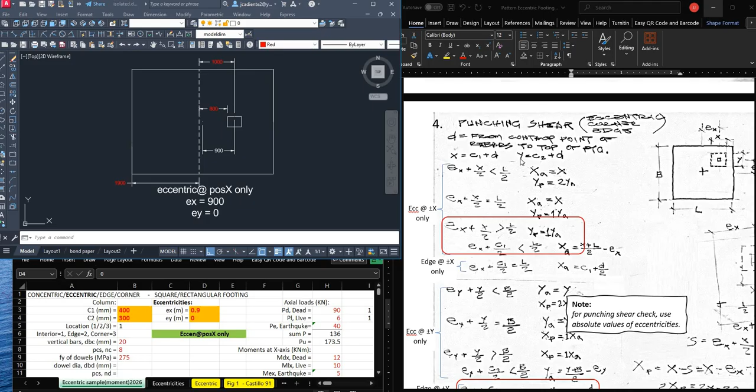Punching shear is also known as two-way shear, meaning shearing happens in both X and Y directions. Meanwhile, check number 5 is beam shear, which is shear happening in one direction only at a given time.

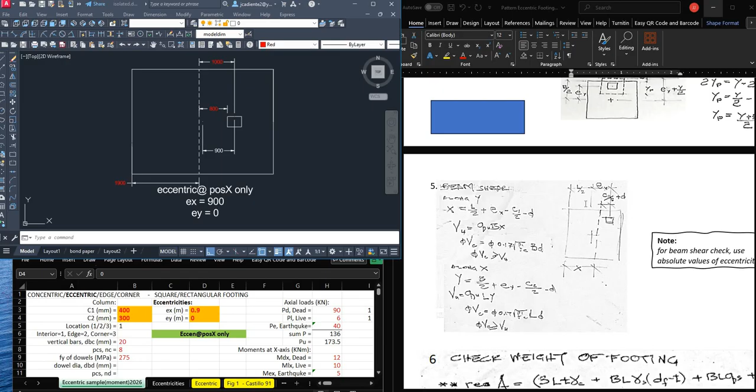So we are along the Y direction first. Here is our column. The force pushed by soil pressure Qu would come from this area. This broken line is the shearing plane, or the shear perimeter.

This shear plane is defined by the distance C1 over 2 plus D. C1 over 2 is half the column width, and D is defined by 800 mm, the distance from the contact point of rebars to the top of footing. In our sample, the D for punching shear is the same D here in one-way shear. So D from the face of column to the shear plane is D.

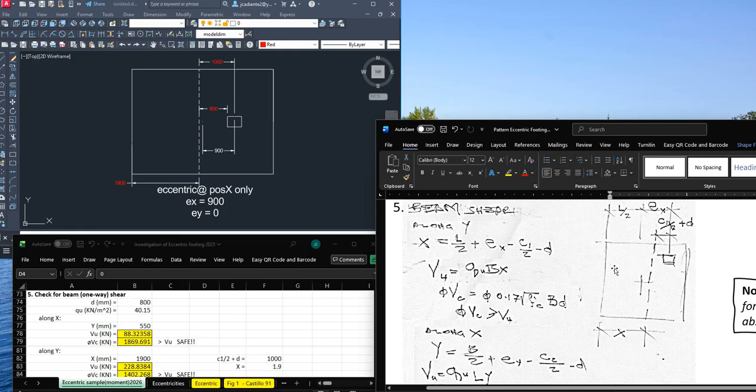By geometry, we get distance X, because X multiplied by height B gives you the area that contributes to the shearing force. So let's get X, which equals L over 2 plus eccentricity Ex, minus the distance C1 over 2 plus D.

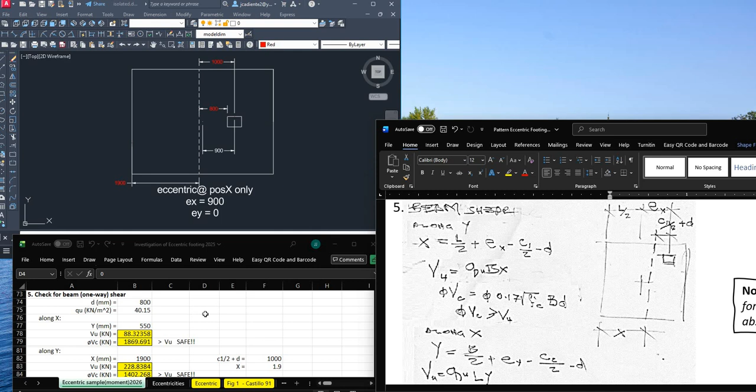Now here is our sample. Let's say we have an eccentricity of 0.9 meters. This is the center. So eccentricity is 0.9.

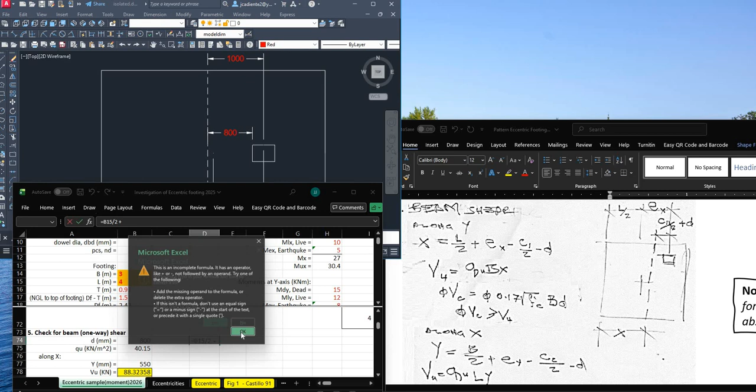Let's compute distance X. That equals L, which is 4 meters, divided by 2, plus eccentricity of 0.9. Take note that you take the absolute value here, because even if it's negative 0.9, it becomes positive. This equation is applicable to eccentricities in either positive X or negative X.

Then minus C1 over 2. C1 divided by 2000, since it's in millimeters, minus D, also divide by 1000 since it's in millimeters. You get X equal to 1.9.

So this is along Y. This computed X from before is the shearing along the Y direction, so your X now becomes 1.9. If you're not sure, plot it in AutoCAD. This shearing plane happens at a distance D from the face of column, so measure that - it's 1.9 meters or 1900 mm.

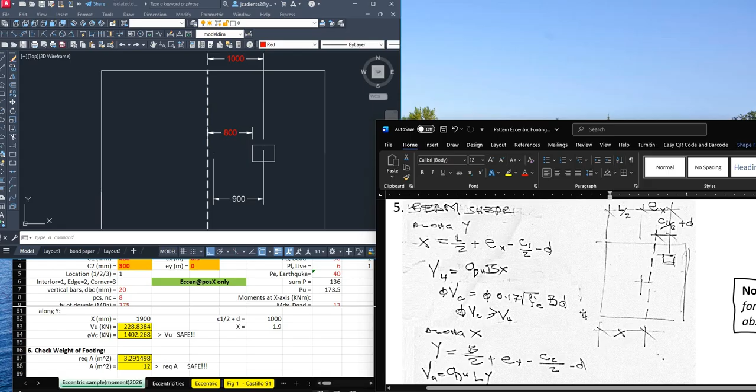Now what is this 1000? It's simply the distance C1 over 2 plus D. Now let's get the shear force contributed by the area, so B times X. Our B happens to be 3 meters, so that equals 3 times 1.9.

That's in square meters. Then we directly multiply by Qu. Where is Qu? Let's get it from check number 3: 40.15. Then the allowable shear force is phi Vc, 0.17 square root of f prime c times capacity reduction phi times BD.

The shear area is this distance B, the length of the shear plane, multiplied by the shearing thickness D. Let's compute that: phi of 0.75 times 0.17 times square root of f prime c, times B of 3 meters, times D.

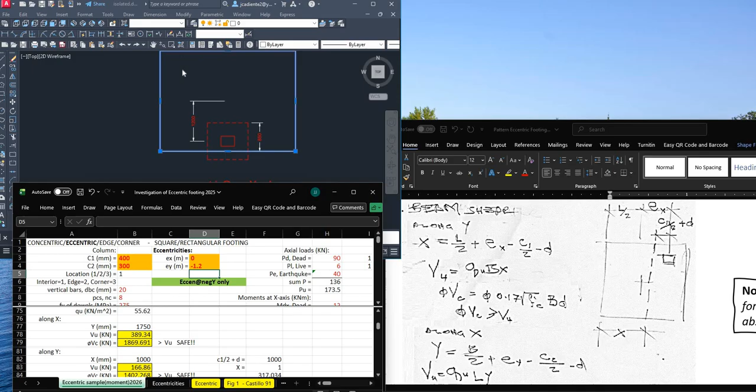The same principle applies to shearing along X. Let me take a sample. This time our eccentricity is negative 1.2 meters. So 0 and then negative 1.2. The shear - let me delete this - happens at distance D from the face of column.

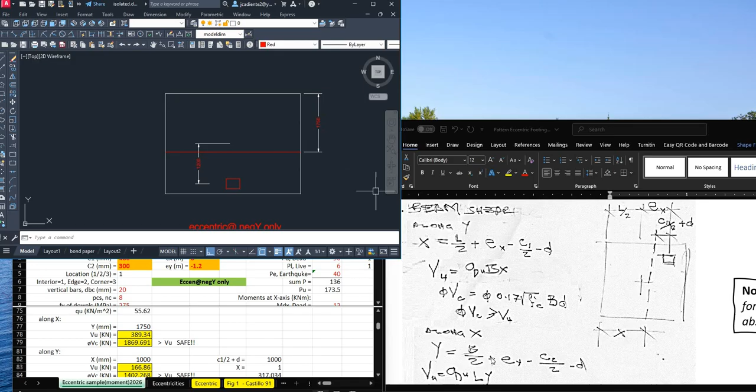So we measure here: 800. Let's say this is the broken line - that's the shear plane. Let's get this measurement. This is now your distance Y, 1750. Now let's compute that using this equation.

That equals B over 2. Where is B? It's 3. So B over 2 plus eccentricity Y - take note, we take the absolute value. Our eccentricity Y is negative 1.2, minus C2 over 2. This is 300 divided by 2000, minus D of 800.

Okay, let me just edit this. So this is B over 2, B over 2 plus absolute value, minus C2 over 2000, that's C2 minus D, and that equals 1.75 meters.

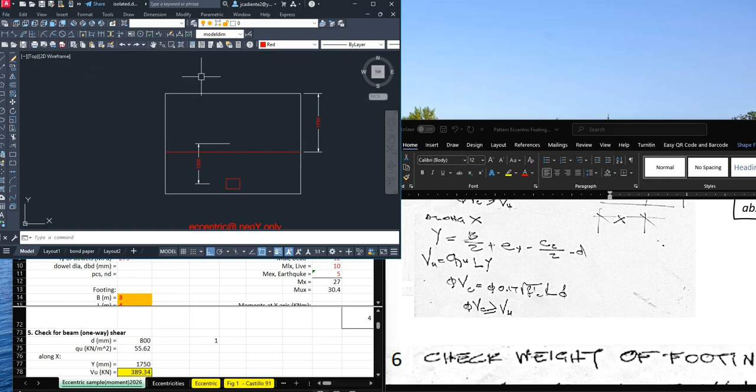Now that is the distance Y, which is this 1750. That's how I got 1750. Multiply this by 1000 to get millimeters, then multiply it with your length L. Our L is 4 meters.

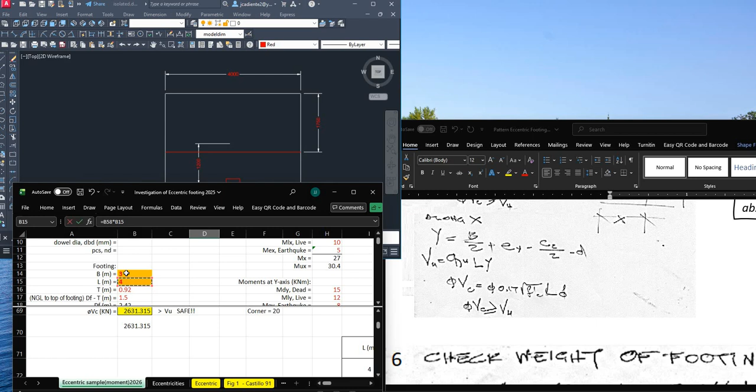Let's solve your VU now. Our VU equals our Qu, 55.62, multiplied by L, multiplied by our distance Y, divided by 1000, and you get 389.34 kilonewtons.

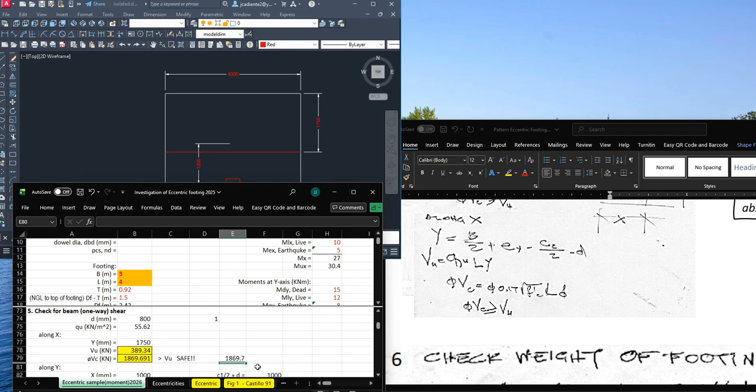Next, the allowable shear force is phi 0.75 times 0.17 times square root of f prime c, times L, times D of 0.8. Multiply by 1000 and you get 1869.69 kilonewtons, the allowable shear force. Now we compare this to your ultimate shear force. Since this is greater than the ultimate, it is safe.

Next is the check weight of footing. This is similar to concentric footing - we have a required area. Involved here are the double asterisks, which are connected to your soil unit weight - whether net or not, whether to consider it or not.

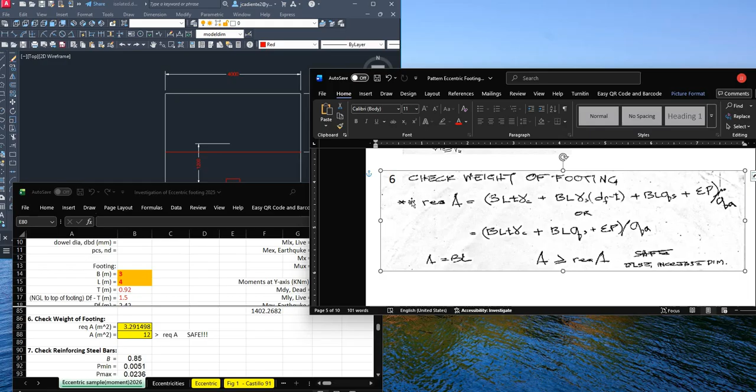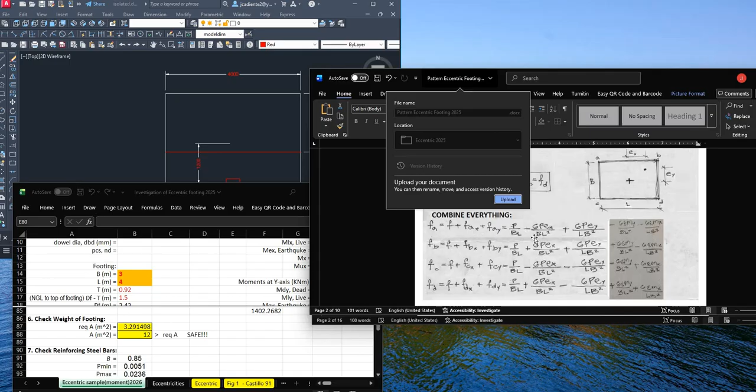Going back to these two asterisks, I opened the pattern for eccentric footing. We have a double asterisk there: if you consider weight of soil, yes, then this will be your equation. Otherwise, if no, then this will be your equation. So that's the check weight of footing.

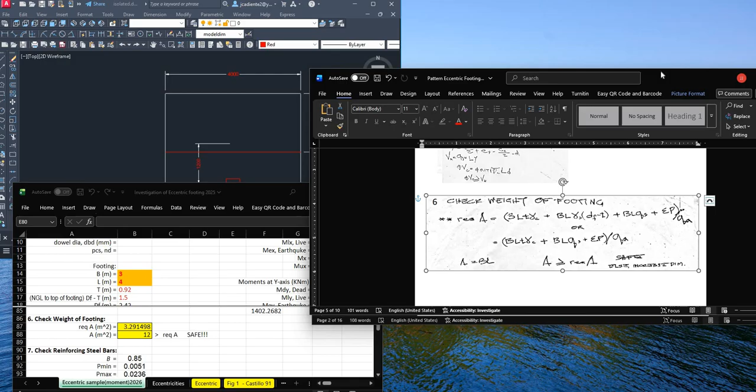This is the same pattern as eccentric footing. Let me show you - this is eccentric. It's the same pattern as your concentric footing. Let me just show you. Next would be the check of reinforcing steel bars.